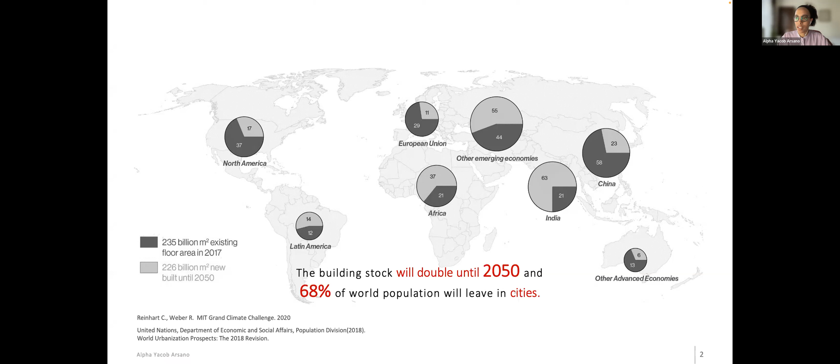What's really fascinating is what we discuss about net zero is not just about here in the US, but looking globally at regions in Africa, the Middle East, or Asia. You can see the need for new construction is threefold - sometimes it has to increase 100%, and that demand is not evenly distributed. So the fact that we consider climate when we think about net zero buildings is very crucial.

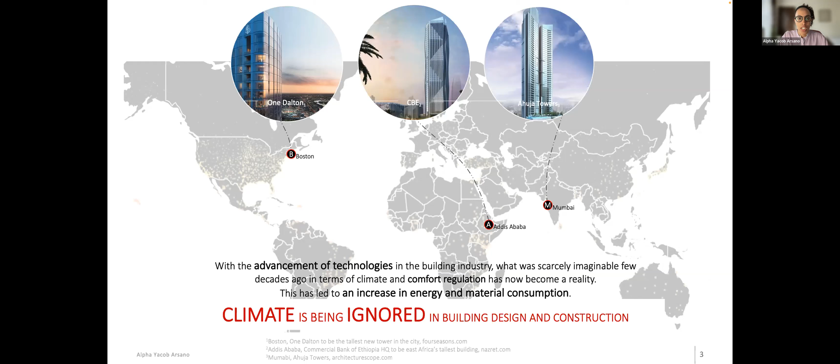This is another slide which shows a comparison of upcoming new constructions in locations such as here in Boston, a temperate climate, Addis Ababa in East Africa, or Mumbai in Asia, a very hot climate. It would be very hard to differentiate which building belongs to which climate, in contrast to 100 or 200 years ago, where buildings mostly mimicked or responded to climatic conditions and other forces abundant locally. This is proof that climate is really being ignored in most discussions happening at the moment in construction, architecture and technology.

Sarah also mentioned how we are really trying to keep or limit global temperature increase, responding to the forces leading to climate change. Studies now show that if the goal is to keep temperature increase below 2 degrees C or 1.5 degrees C compared to pre-industrial time, it's very important that we take action in buildings, because all building stock would have to become net zero by 2050 to achieve that goal, originally set under the Paris Climate Agreement.

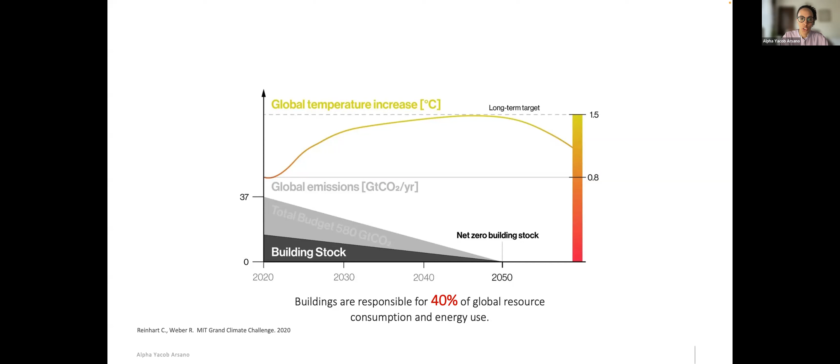Of course, buildings are responsible for 40% of global resource consumption and energy use, which makes the issue even more important. And of course we say we have to have net zero buildings by 2050, but the question is, how can we do it? It's not as simple as the goal really is set.

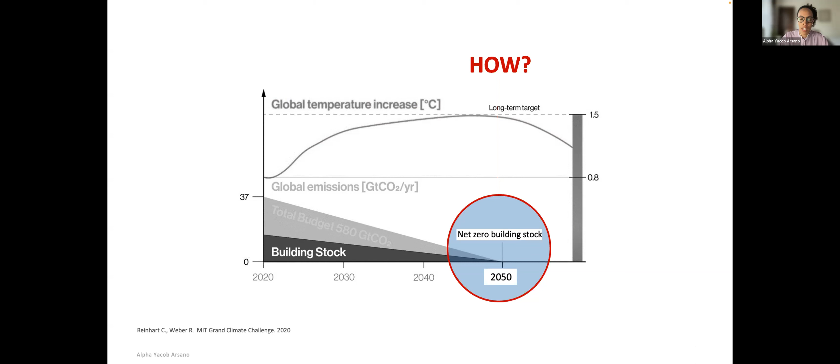One approach is to think about how we empower designers, homeowners, people in the construction system. Evolving design attitude becomes very important. Instead of completely jumping into high-tech solutions or transitioning 100% from passive and low-tech strategies to a high-tech strategy, knowing how to dial between those two extremes would be key.

Just to illustrate an example, one of the Bostonian vernacular apartments or residential buildings - I live in one of those. Most of them are really low performance, probably with poor glazing, low insulation, and equipment, lighting and other systems that aren't high performance. They rely on probably a gas heating system.

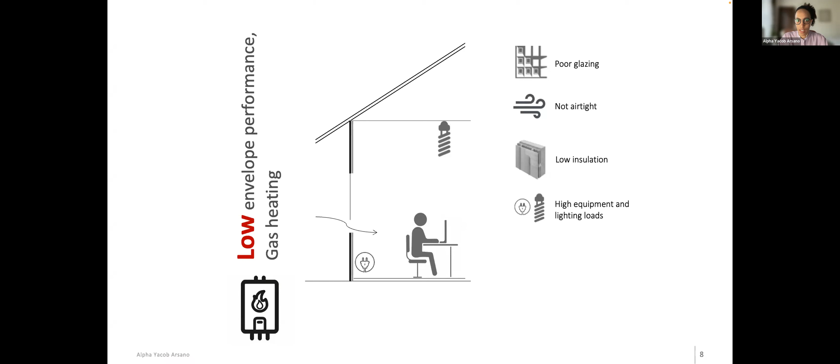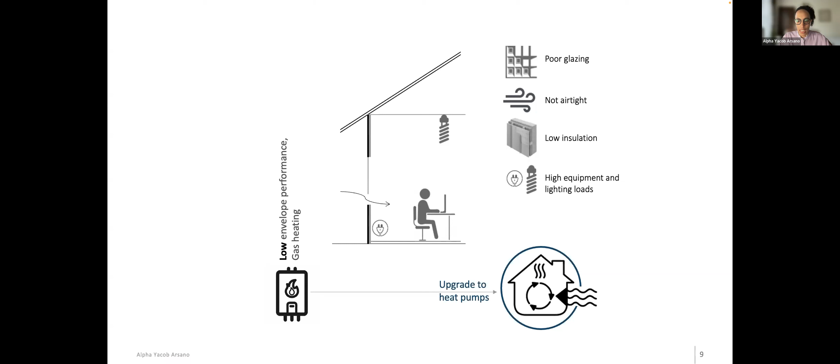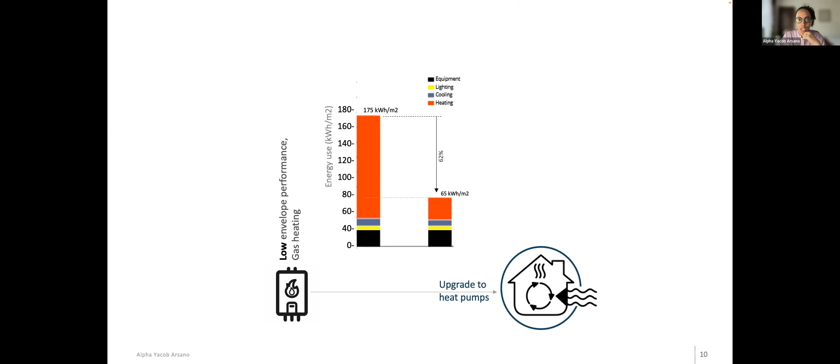If we look at strategies to improve that home, the first thing some homeowners might think is: let's upgrade and install heat pumps into the design. Doing some quick comparisons, I did a simple calculation comparing the original low performance version to one with upgrades, to see how much energy we save by installing heat pumps. In this simple assessment, 62% of the heating load could be improved.

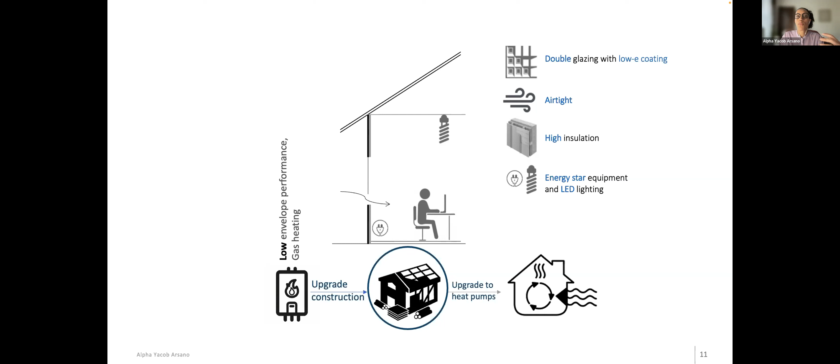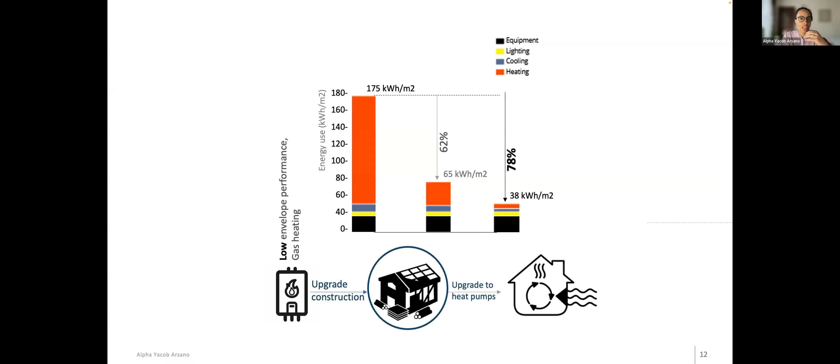But then the question is, how do we know if installing heat pumps first is the best strategy versus doing other upgrades? There's a possibility to replace glazing, improve the airtightness of the building, add insulation, or use efficient equipment and lighting. With this assessment, if we prioritize these kinds of home improvements before the building heating and cooling system, we might get much further in terms of improving energy use - down to close to 78% in energy savings.

Some of the work we do is making these kinds of assessments accessible for homeowners, students, designers, consultants, anyone doing these studies. That's why we launched an online platform, a web tool called Clima Plus, which is openly accessible for the public. The idea is using powerful tools like our phones or a tablet to explore various strategies and compare combinations of passive and active strategies before jumping into fully active, high-tech solutions.

So today I'd like to leave this discussion with three points, which I take with myself for thinking, and also for everyone else. First, when we talk about net zero, it's very important to think how we can integrate active and passive building strategies, meaning we prioritize a hybrid way of designing. Second, a hybrid building design means we also take climate into consideration - a bioclimatic design approach is still really relevant for the future building stock, meaning every climate offers at least a little opportunity for a passive strategy.

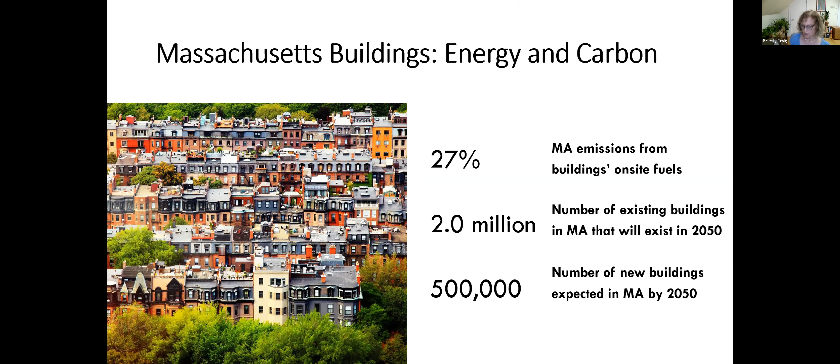So I'm just going to talk about 2 initiatives that MassCEC has worked on. We definitely are not the only players here, but the first is around new construction. And in new construction you hear a lot about passive house design. The Germans have been fantastic in coming up with these standards around passive house design, and they can be applied to single family homes, to multifamily - we have an office building in downtown Boston that's going to be passive house, the office building.

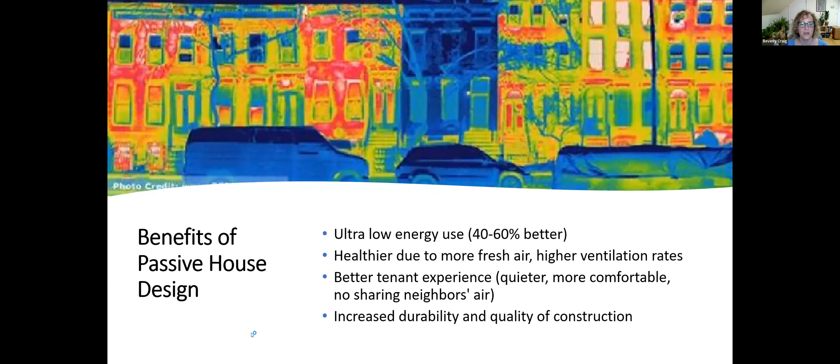And what does it mean? It's really super efficient new construction. We're talking like 40 to 60% less energy per square foot. There's a lot of other great benefits associated with it too.

I learned English first, and the German does not sound great to most Americans. So passive house - house means building in German. So when they came up with the standard, they're talking about buildings in general, not just single family homes. You definitely can do passive house on single family homes, but it actually gets a lot less expensive the bigger you get. You have less square footage, and less outside cold or heat that could be coming in or out.

Here in Massachusetts, going back maybe 5-6 years ago, there was just a lot of skepticism from people in the state saying building is so expensive in Massachusetts already. Adding passive house onto that, it just sounds super expensive.

And so we'd actually heard very differently from our friends who work in the affordable housing fields in Pennsylvania. They've been for a couple years giving better scoring for low-income housing tax credits if people came in with a passive house design for multifamily rentals. So we'd been hearing it wasn't really that expensive. We also heard that from our neighbors in New York, a lot of especially New York City projects.

So we had no luck convincing our state agency that works on affordable housing to do something similar to what Pennsylvania did, because they were worried it would be way too expensive. So we said, well, what can we as an agency do? Why don't we give some people some extra money and get some people doing this work?

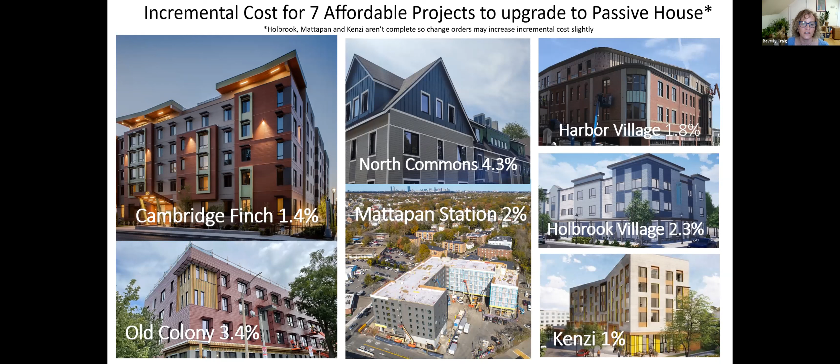So in all cases, we found that higher levels of ventilation was one of the 2 highest costs in all of our projects. And I've got to say, after COVID, I think it's not that hard to sell people on better ventilation in multifamily buildings. So cost is one piece of it, but performance is another.

Are these buildings really performing 40 to 60% better than what people would build otherwise? And we're fortunate in that a number of cities now require energy disclosure ordinance for larger buildings. So you could actually pull this data yourself from Boston's website if you want, for larger buildings that were built between 2010 and now. The one in green on the left, the far left, is the building that's the picture of.

It's the distillery. It was the first multifamily passive house building in Massachusetts that was built. And if you look at the purple buildings and the blue buildings, the purple are LEED certified buildings and the blue are code ones. So overall, the median is 63% less energy for this passive house building. So, we were expecting between 40 and 60%, and we're seeing on the better end of that range.

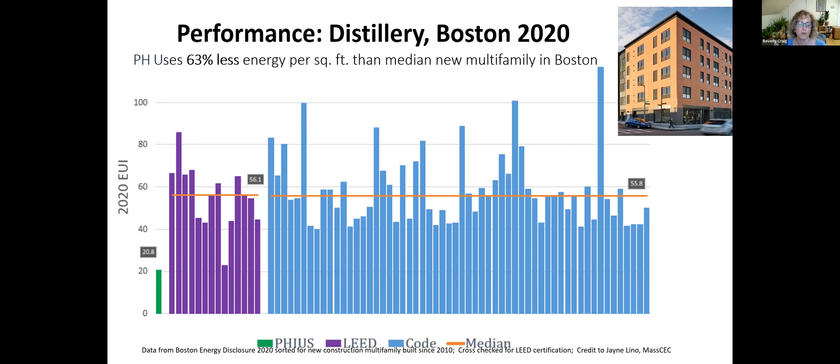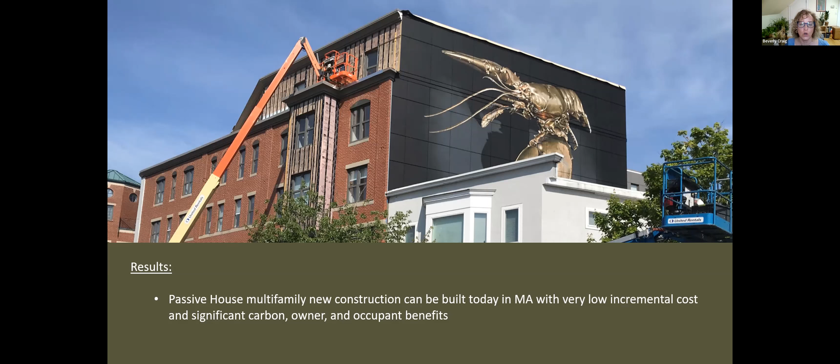And this is consistent with data in Philadelphia, in New York. There's a couple of projects in New Hampshire. We have similar data. But the main point is for a pretty low incremental cost, we're seeing very, very large savings in terms of how much energy per square foot these buildings are doing. And if net zero is our goal, we got to go here with this kind of building.

So 9 months after Mass CEC did our 7 projects that we were doing, Mass Save came up with a similar project. So instead of $4,000, they're giving $3,000. And it's not just for affordable housing, it's for any multifamily building in the state. The response has been huge.

There's over 116 buildings that have either done some work on a feasibility study for what it would take to get to passive house, or actually done the modeling. We'll see how many of those actually do certify, but it's really a game changer for what's been proposed in the next couple of years for multifamily buildings.

So that's new construction. But we have a much bigger, harder problem with our existing buildings.

Having gone to MIT, you know that Boston and Massachusetts have a predominance of this building type called a triple decker. It's 3 identical units stacked on top of each other, usually 100-year-old housing. It was often built by immigrant families who would live on one floor and rent to cousins on another, and rent one floor out. A lot of times they've even stayed in the family over generations and have a lot of deferred maintenance.

They also are terrible performers in terms of energy. If you've lived in them, we love them, they're awesome, but they're often very uncomfortable because they don't have much insulation at all. Air tightness, which is so important when we're talking about passive house, is really, really bad. They're drafty. Since we have about 12,000 of these in the state of Massachusetts, if we're going to decarbonize, Mass CEC thought, what can we do? Let's have a competition, a design competition.

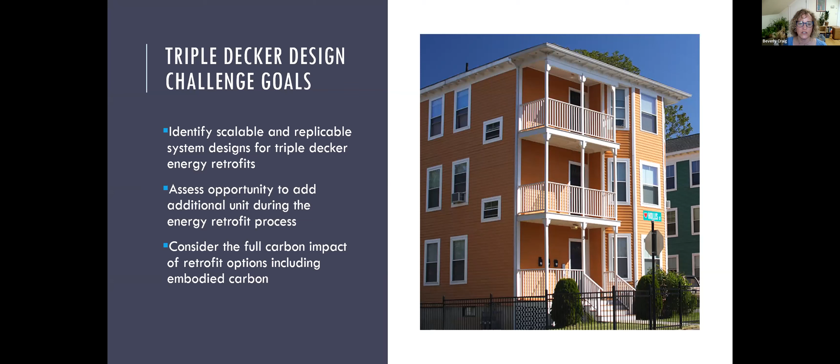We gave people a couple sample triple deckers and saw what ideas people could have, and gave some prizes. On our website, you can see all 13 different proposals. There are some really great, incredibly interesting ideas. Each one has a poster where you can see where it started, how much energy was decreased, and a summary of what they were proposing and the costs.

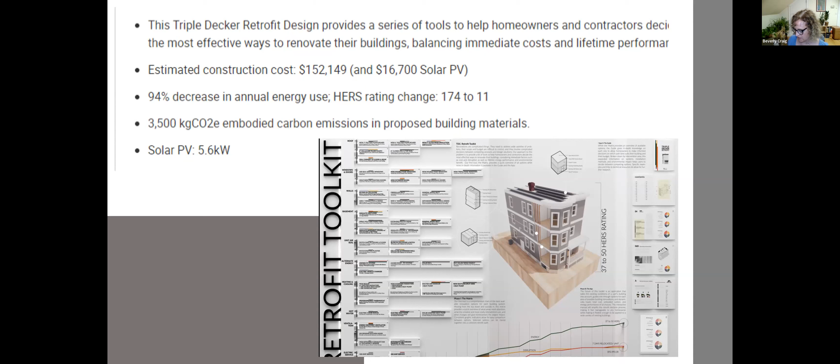One of the things we learned is it's pretty expensive to take an old house and retrofit it. The costs per unit were at the low end 50,000. At the high end, we were talking about very large numbers.

So what we wanted to do, and what we are doing right now, is to test by providing some funding for affordable housing owners who have triple deckers to actually do this work, so we can put better numbers on them.

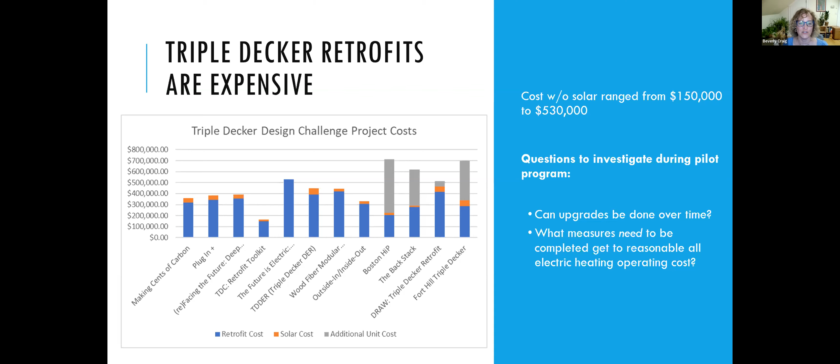I guess what I would say is, in general, the proposals we got for the design competition had lots of very interesting things, but probably Tesla proposals when we need a Chevy Bolt, right? We need to figure out how to do this less expensively so we can scale.

Lots of really interesting information. Solar on all of these was really good payback. The challenge is, who's going to get the electricity in 3 units, right?

So we are hoping to test out a couple different possibilities with the pilot money that we have. We think, especially when there's an owner occupant on one of the floors, powering one of the floors with the solar, and then some common area things like laundry and other things with that solar, might make sense.

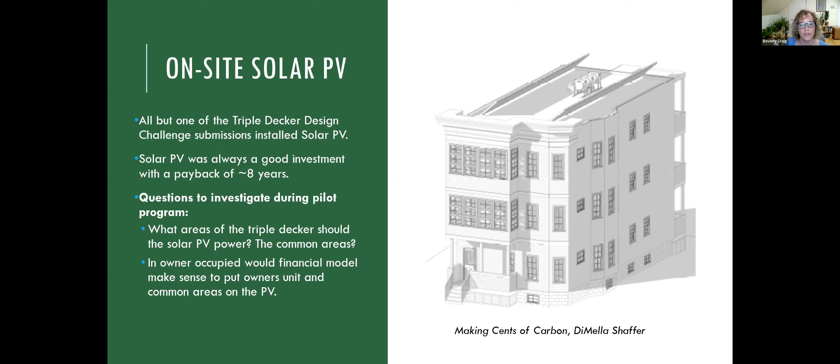We also had a bunch of proposals that suggested adding at least 1 unit to one of these buildings as part of a deeper energy retrofit, sometimes putting panels on the outside of the entire building. Why do we encourage those? Because it really changes the economics pretty dramatically if you can add additional units. The extra value that you can create might be able to help cross-subsidize that retrofit work.

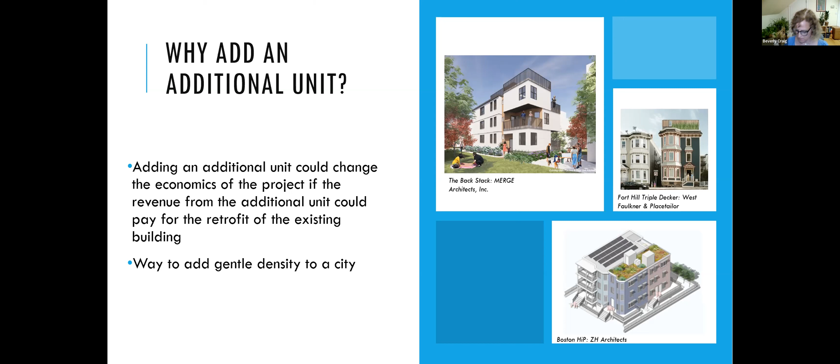We also know that in a couple communities in Massachusetts, it should not be that hard to do this extra unit adding on. For example, in Cambridge and in Somerville, there are affordable housing overlay districts that would allow this density as of right, so you wouldn't have to go through a normal special permit process. It would be much easier than you would think in a lot of other communities, as long as that extra unit is affordable housing. So I'm going to sign off here and give it to Nick, because what everybody wants to hear is how you actually do this on your house.

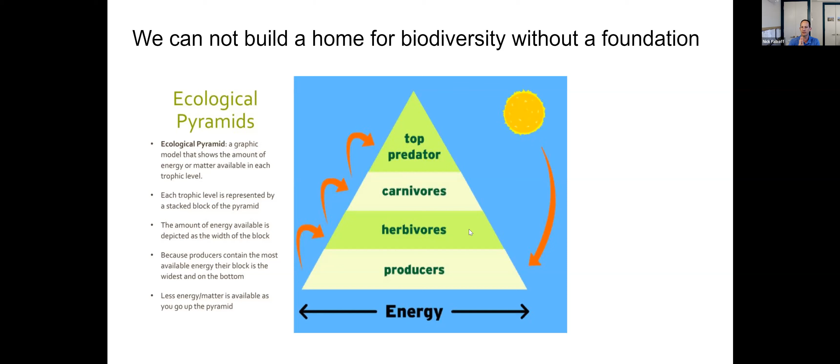Looking at ecological pyramids, I've been looking at Tallamy's podcast and his books. He talks about how the energy transfer, when we don't put native plants on our sites or in our projects, damages the food chain. We can't really build a home for biodiversity without a foundation, and the producers are the foundation. I feel that so much of what we talk about in building is the building itself, when the landscape is a big part of that.

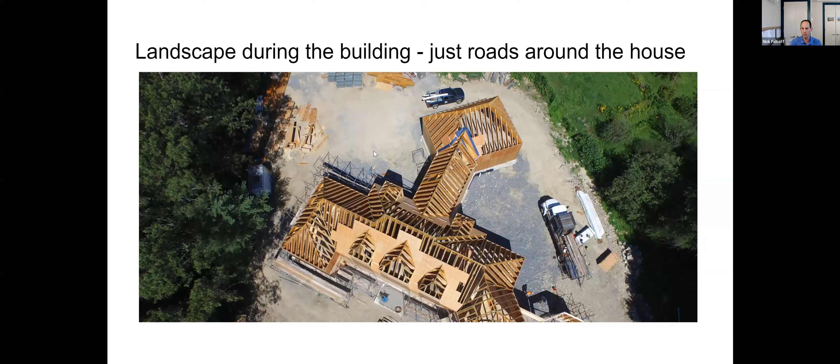This is drone footage of the Whalen Passive House being built. During landscaping, we really just build roads around these houses. This is a super energy efficient certified passive house, but we sort of destroy the site when we go in. This homeowner we built for wanted not only an energy efficient home, but also wanted their house to have a lot of biodiversity. I wasn't interested in this at the time, but they were ahead of me in this.

Something I like to talk about in these presentations is that we forget we're not the only earthlings. When we destroy these habitats to build homes, we're really damaging the ecosystems. If we can expand the conversation about these buildings to talk about the energy transfer through the food networks outside of them, I think it's good for everyone who lives in that building — good for the kids, good for the occupants, and a healthier way for us to build.

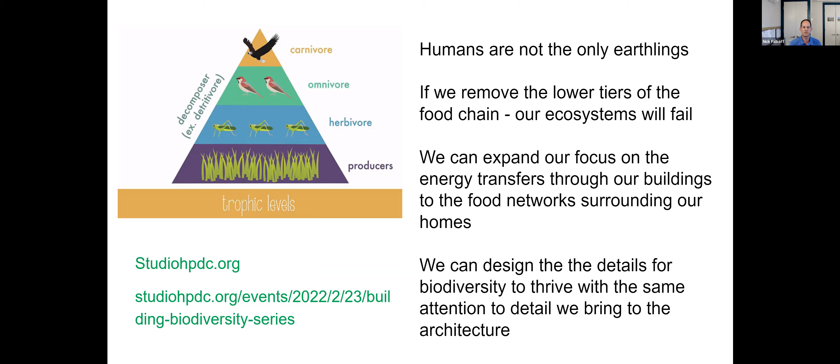So we're hosting a biodiversity course right now on the studio website. I want to challenge some designers, and myself, to start thinking about designing the details for biodiversity to thrive with the same attention to detail that we bring to the architecture. I don't know if we'll do a series on that, but we're currently running one just on biodiversity.

Doug Tallamy talks a lot about using our yards as research stations, and I've thought of the studio as a research station for Passive House and new technologies. Applying that to the house and the landscape is really what we're trying to implement now.

This is the studio under construction. That's Craig Buckley, one of our project managers, presenting on a Passive House retrofit of the building that I'm sitting in now, which is our office and the studio.

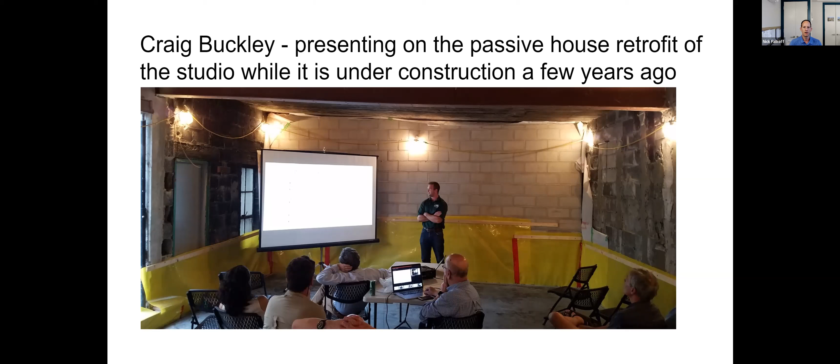I'm not going to go into the technical details about how the building is built. All that stuff is available. I just wanted to talk about what we're trying to do with the studio and how it functions as a laboratory of sorts.

Dan Rubin, as the chairman of the board of Green Newton, he's somebody else who I've been doing a lot of advocacy work with to get the city of Newton to advocate for passive buildings. So when developers wanted to build a bunch of new developments in the city, they needed Green Newton for community support to get these big developments through.

I'm happy to talk offline about how he did that locally. But basically, they advocate for minimizing building operation energy, minimized embodied carbon in the buildings that are being built. Buildings had to be all electric and off the natural gas grid, and then minimizing the carbon footprint for transportation to and from the buildings.

And because of his advocacy work in Green Newton, there'll be over 1,000 units in the city in the next 10 years built, or maybe it's 800 units, that are going to now be Passive House because he advocated with the developers that it made sense economically.

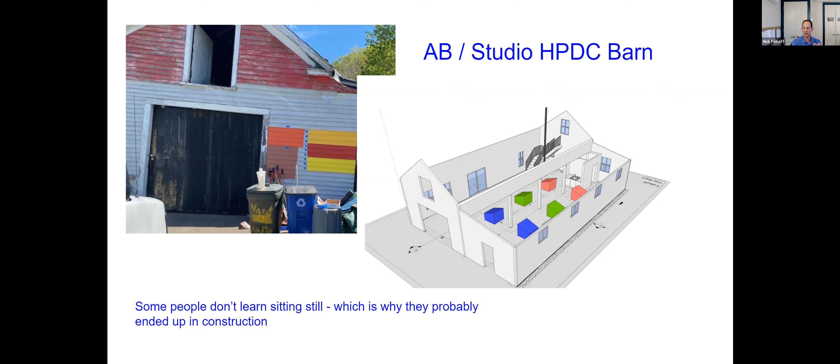It shouldn't be just one hands-on course that's available in the whole state. We need lots of hands-on courses.

So that's the course we're going to be running. It's called High Performance Building for Carpenters. It'll be 6 4-hour workshops, and we're going to be teaching carpenters how to do this stuff. How do you implement it? How do you troubleshoot? What's the approach?